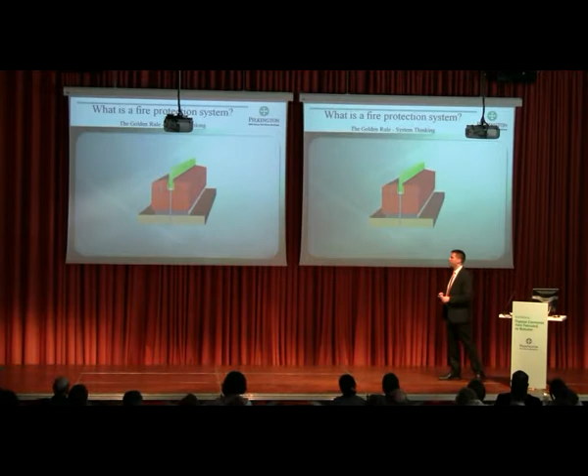When we're talking about fire protection glass, we need to be aware that it's not only the glass itself which helps us to protect the people. It always needs to be considered that it is a framing system which needs to be proved and tested, and only if we use a framing construction with all fixing details designed for fire protection, fixed properly to the surrounding construction, and, of course, the fire protection glass itself. Only if we consider all these components do we achieve a proper solution for fire protection issues.

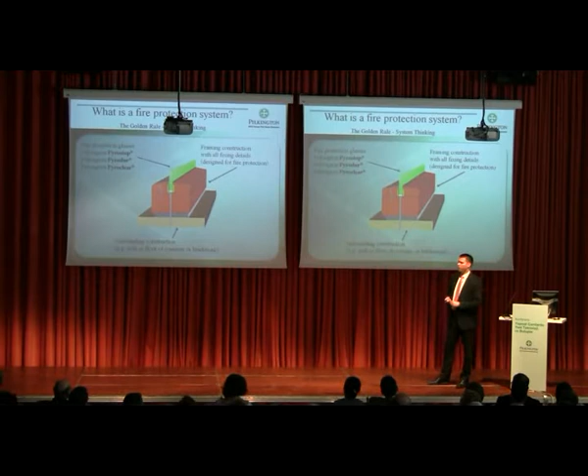So let's come to the requirements for fire-resistant glass. We distinguish 3 different classifications. First of all, we're talking about the so-called E-class. It means that it fulfills just basic integrity. So there's still heat passing the pane, but it's a barrier against smoke, flames and fumes. So this is, in our product range, the Pilkington Pyroclear.

Then there is the next classification called EW. It's a classification with a higher performance, with the so-called enhanced integrity. So we have the basic integrity plus reduced heat radiation.

The third level with the highest performance is the glass which fulfills total thermal insulation. So we have the basic integrity plus a full thermal insulation. That means if somebody, for example, is escaping in front of a glazed partition, then he will not be influenced by the fire. He can even touch the surface because there is no heat passing the pane, and no heat influencing the people passing a glazed partition or a door or whatever.

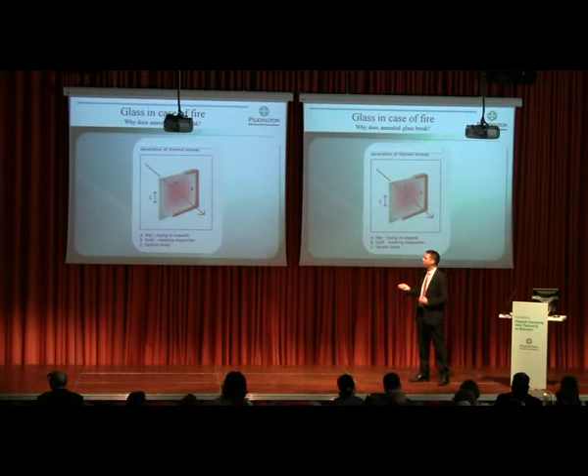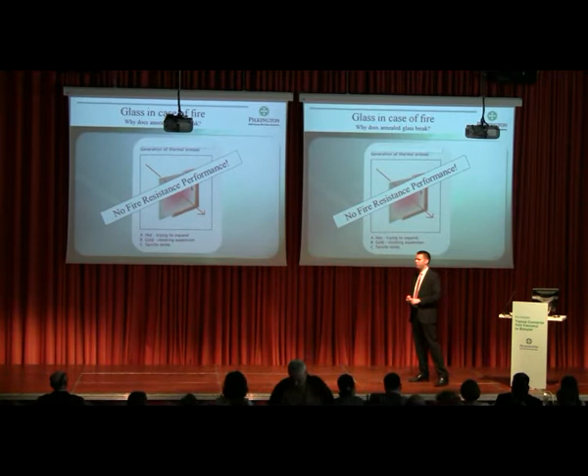So we're saying that if there is a temperature difference from here to here of approximately 40 degrees, so that means you have 20 degrees here, 60 degrees in here, then normal annealed glass will get some cracks and then totally collapse in case of fire. So although it is a non-inflammable product, annealed glass is not able to withstand any fire. So no fire resistance performance for normal annealed glass. That is the reason why we produce fire protection glass. And we need it.

So let's come to the composition of fire-resistant glass. The composition is in general the same for the Pyrostop and the Pyrodur glass. So for the glass with total thermal insulation and for the glass with reduced heat radiation. What we do is we use simple float glass. I just explained to you, float glass will break in case of fire, but we want the float glass to break. Because what we do is, we take the float glass and we fill some intumescent interlayer on that float glass. This intumescent interlayer is not visible, only if it reacts in case of fire.

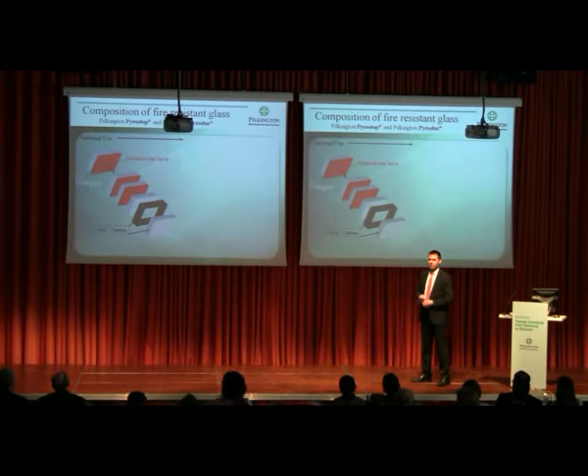So what we do is, we take several panes of float glass with several interlayers in between those float sheets. And we put together a kind of sandwich. So several float glasses with several interlayers foaming up in case of fire. So this is the basic construction of a Pyrostop and a Pyrodur glass. What else is possible? Of course, you can build up double glass units for additional sound control requirements or solar control requirements, whatever. So all you know from the non-fire protection glasses is more or less also possible with fire protection glass.

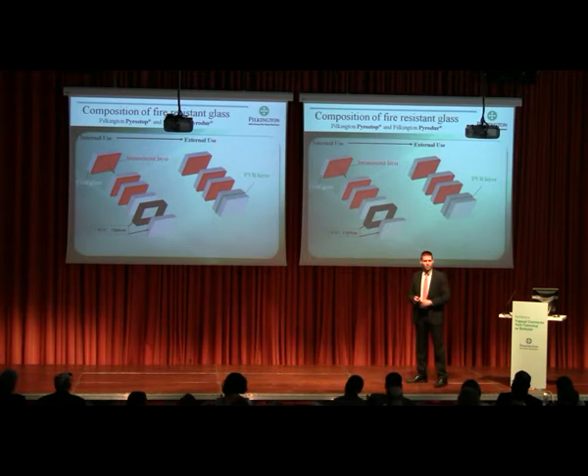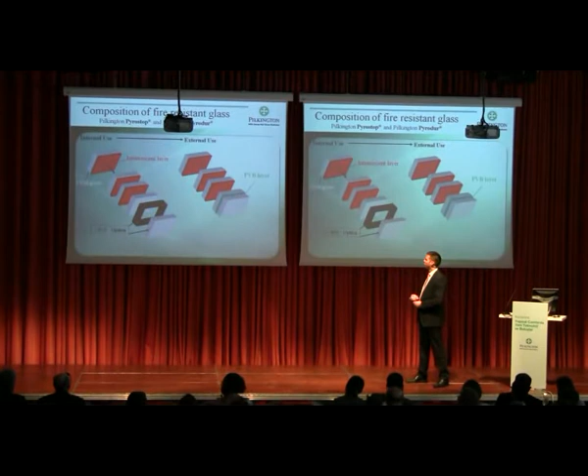We distinguish internal applications and external facade applications. The composition actually is the same. There is only a minor but a very important difference. We include a laminated glass into that composition to protect our interlayers from UV radiation. So if we have fire protection glass installed in a facade and if it is exposed to sunlight, for example, then we need to protect the interlayers from the UV radiation. And therefore, we incorporate a PVB layer which absorbs the UV radiation. Again, double glass units, of course, possible. External and facade application, of course, usual.

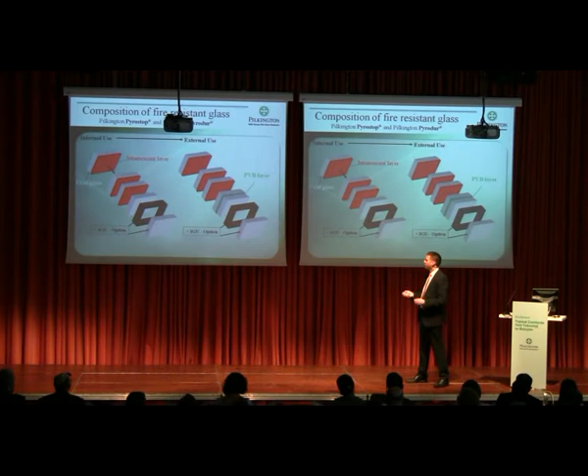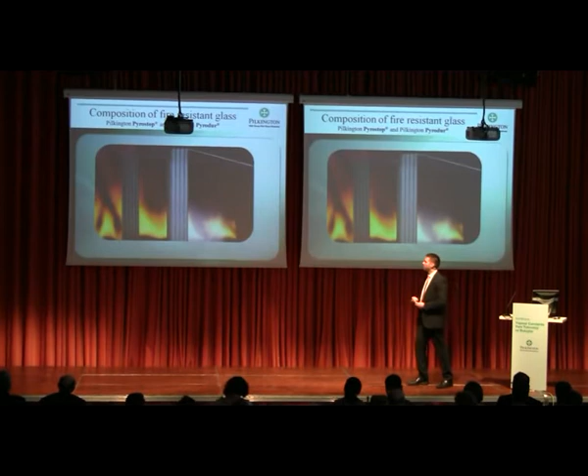So again, some picture to see again the composition. You can see the different float panes with the interlayers, additional PVB layer for external products, and this is the typical composition of Pyrostop and Pyrodur.

So let's have a look at the reaction in case of fire. So this is again how it looks like: float glass, interlayer, float glass, interlayer. The fire starts. We have temperatures of 100, 200, 300, 400, up to 1000 degrees in case of fire. The first float glass cracks. The first interlayer is foaming up and is building a kind of opaque shield. I will show it to you on the next slide. I have some pictures as well of that.

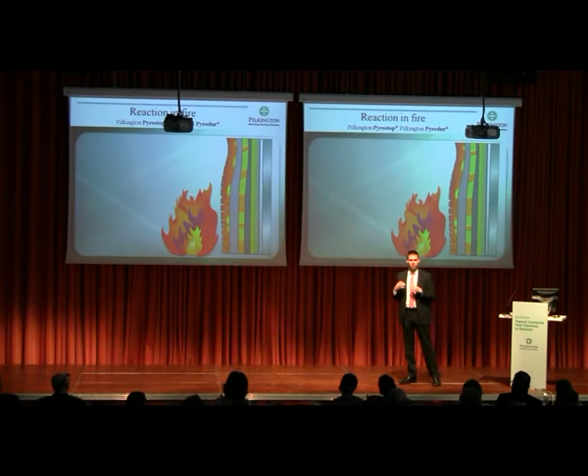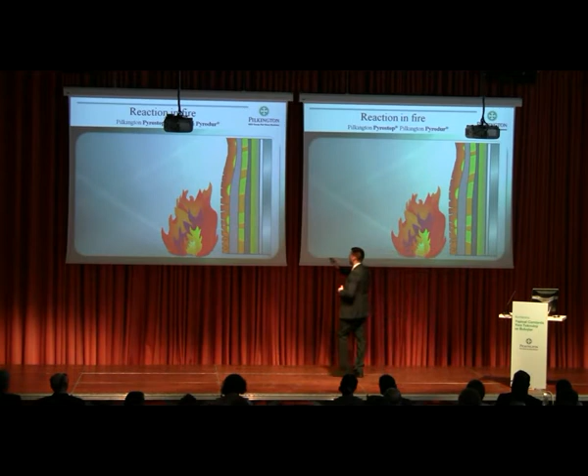And what happens is that in this interlayer, which is foaming up, there is some water included. And this water is vaporizing. And so the whole construction and the whole glass is cooled down to a certain level. So for such insulated products, we measure temperatures on the unexposed side, on this side, after 30 minutes, after 60 minutes, after 90 minutes, whatever we would like to achieve.

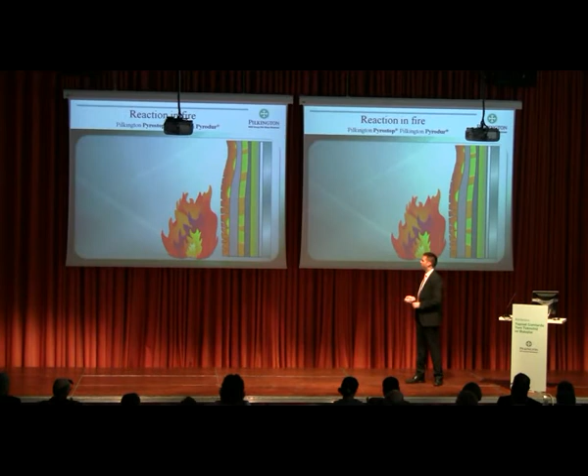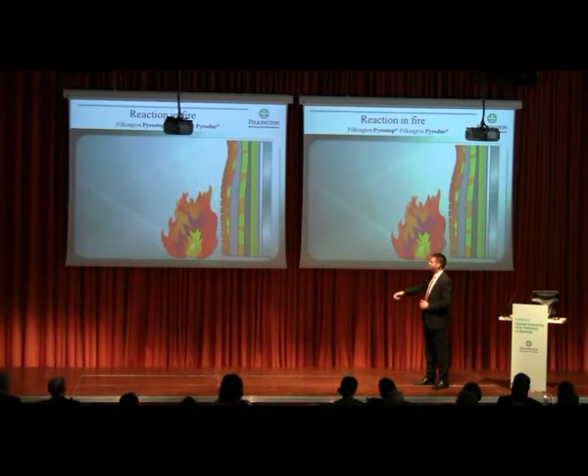And the surface temperatures we are measuring on this side are after the required time about 100 to 120 degrees. On this side we have almost 1000 degrees. So there's really a huge difference if you're using an insulated product like that one. So the interlayers are foaming up step by step after 30, 60, 90 minutes, whatever we need. All interlayers performed. And in a standard fire test, it might look like that.

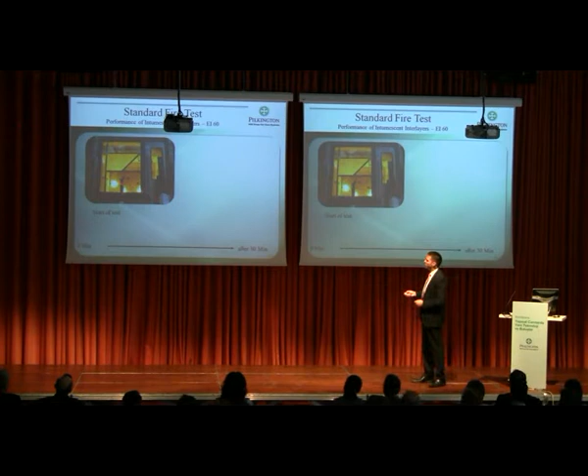We have in that case a steel frame installed in a 4 meter by 4 meter big furnace. The burners are starting, and you can still see after 1 minute the back of the furnace. But what you can already see is that here is the hottest point in the furnace, and the first interlayer has already started to react.

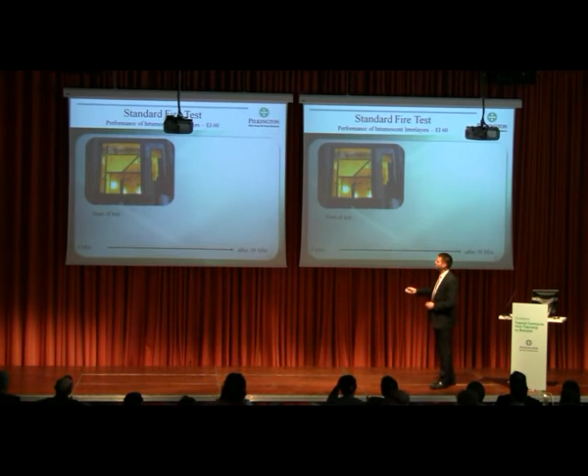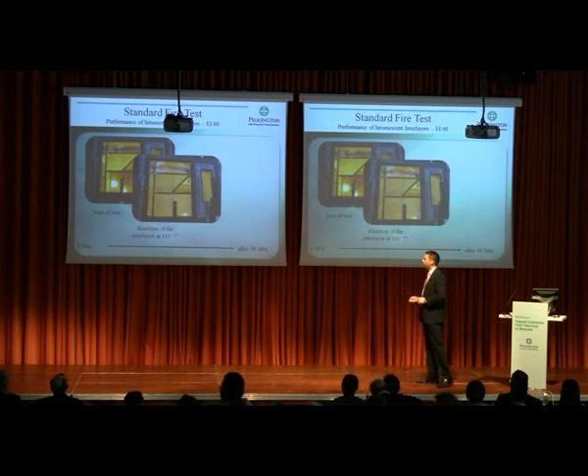So after a couple of minutes it looks like that. All first interlayers in the composition have started to react due to the heat we have in the furnace. So the reaction starts at 100 degrees. 100 degrees in such a fire test are achieved after 1 minute, and then it goes straight up until 900 and 1000 degrees. So if all interlayers have reacted, it looks like that. You won't see the furnace and the fire behind it anymore, but it's possible to stay in front of the pane, to even touch the surface, so you are totally protected by such insulating units.

Okay, there is another composition. I told you at the beginning that there is also a so-called E-class that is just for basic integrity. We offer such product for 30 minutes and for 60 minutes requirements, and it's really just monolithic glass, specially toughened, especially the edge working is a special one, specially grinded, and with such very thin, very light, and actually pretty cheap product we can achieve basic integrity for 30 and for 60 minutes.

So in a fire test, for example, it looks like that after 35 minutes. Huge pane, in that case 1.8 by 3.5 meter. The glass is still in place, but you have all the heat radiation passing the pane. So there are no interlayers, nothing which reacts, it's just the pane itself which stays for the required time due to the way how we produce it.

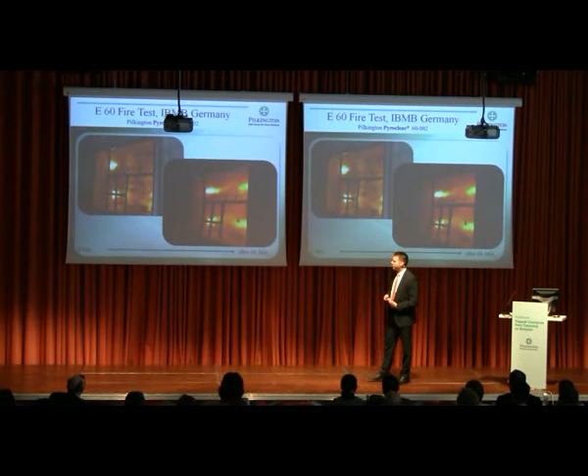And now I was talking about heat radiation and insulation. It's a bit difficult to feel it when I'm just explaining it. So I have a very simple picture, but it explains it in a very simple way. On the left side there is a Pyrostop installed, so with intumescent interlayers absorbing the energy from the fire. On the right side there is a Pyroclear installed without any interlayers, and you see the difference, very simple.

On the left hand side you can even touch the surface. On the right hand side, if you put some paper, for example, in front of the pane, it will easily ignite. So that is the huge difference between insulated glass and non-insulated glass.

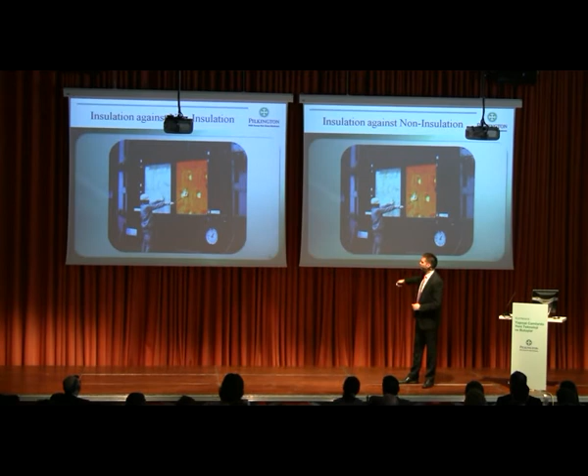Okay, let's summarize the product range we can offer. Pilkington Pyrostop for insulation and integrity. Multi-layer intumescent glass comprising float glass. Full thermal insulation means basic integrity plus thermal insulation. Available for 30 minutes, 45 minutes, 60 minutes, 90 minutes, 120 minutes, up to 180 minutes. So just to give you some impression, the 30 minutes type is 15 millimeter thick.

Its weight is about 30-35 kilo per square meter, and the type for 3 hours is 94 millimeter thick, with a weight of almost 200 kilogram per square meter. So you see, the higher the requirement is, the thicker the glass will be, the more interlayers are inside, the more interlayers we need to react, but it's possible to achieve even 3 hours fire protection with such a huge and big and thick glass.

Okay, the Pyrodur EW class, probably not so important for you in Turkey. Again, the glass comprising float glass, integrity plus reduced radiation, for 30 and 60 minutes classifications available. So far we actually only have one country where this class is implemented in the building regulations. It is the Netherlands. So this is probably not so important for you. So for you it's, I would say, mainly the Pyrostop as well as the Pyroclear.

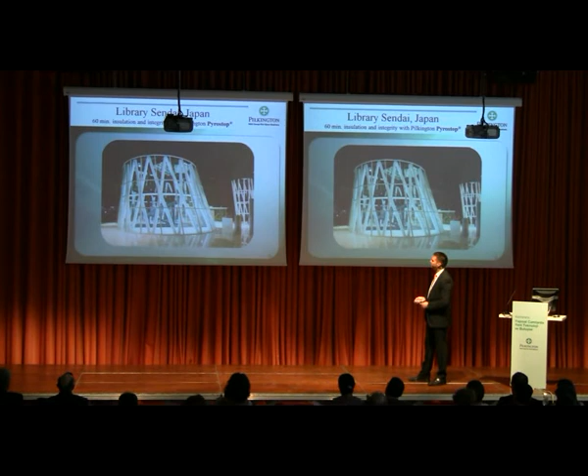This is the project in Japan, the library in Sendai. This is again a glass for 60 minutes integrity and insulation to protect the staircase. This is one typical application for an external requirement, so you have just a small area of the facade glazed with fire protection glass to avoid the spread of fire from one part to the other part through the facade. So this is actually a typical application for facades.

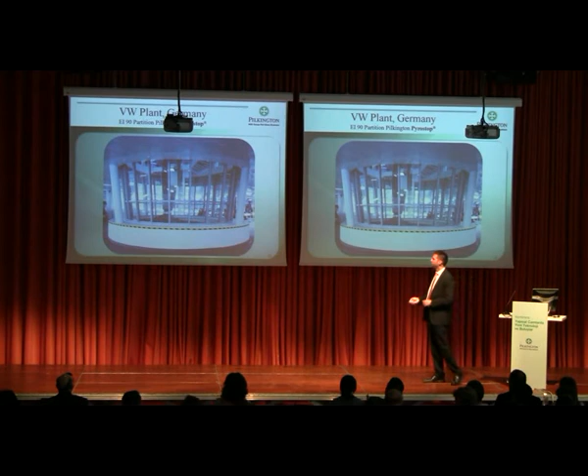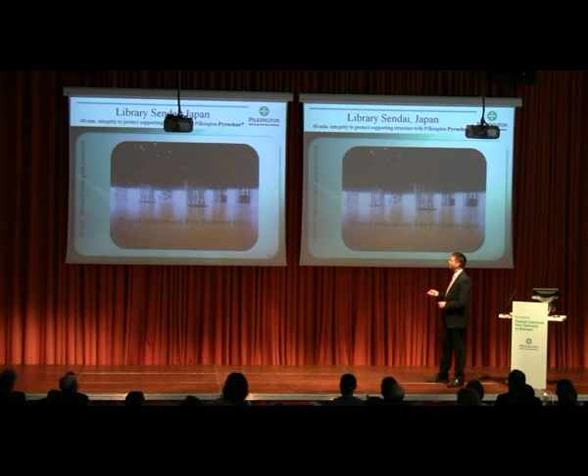Again, the library in Sendai, I've already showed you, this is a good example for Pyroclear. That means for 60 minutes integrity, the project without fire-resistant glass and with fire protection glass. So all this is Pyroclear for 60 minutes integrity to save the structure, the steel structure, and to avoid that flames are passing from one level of the building to the next. Again, Pyroclear for E30 projects glazed indoors, internally for a lower safety level, but this is of course possible as well.

Okay, almost finished. So to summarize my short presentation, fire-resistant glass can be used in a wide variety of building applications. I just showed you just a few of them. Make sure that the glass is always a part of an appropriate fire-resistant, fully tested framing system. That is what I mentioned at the beginning, so it's not just the glass. You need to also consider the framing construction.

We have a wide choice of fire-resistant glass types with different levels of performance, with 3 different safety levels. The first one is the one for integrity and insulation with Pyrostop glass. Second one for the integrity and reduced heat radiation, this is Pyrodur, and at the end Pyroclear for integrity only, available for 30 and 60 minutes at the moment. Further requirements, as I mentioned, solar control, sound insulation and so on, are available as well.